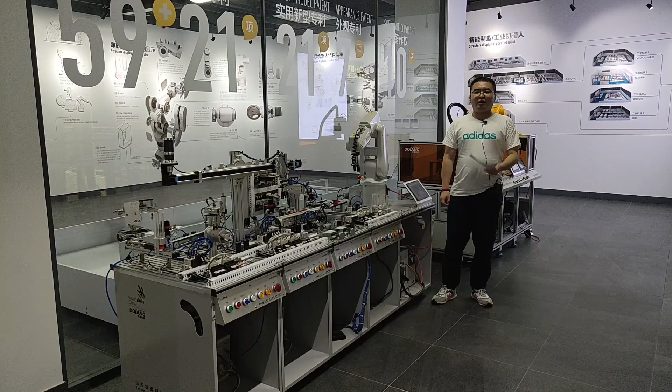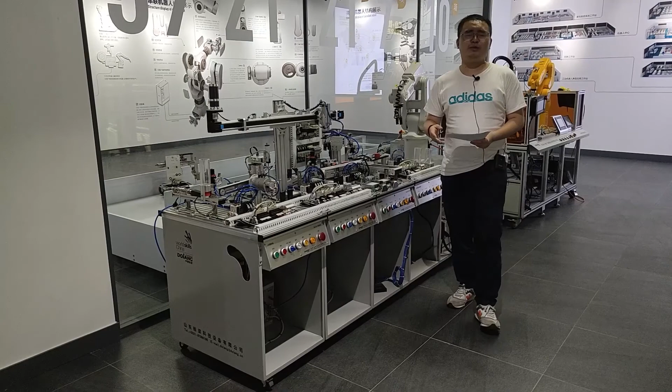Today I will introduce our modular production system DLMPS-500D, which can really reproduce actual industrial production process. In the next 2 weeks, we prepare a wealth of vocational equipment, operating and knowledge. If you have anything you want to know or are interested in, please feel free to contact us. We will reply to you in time.

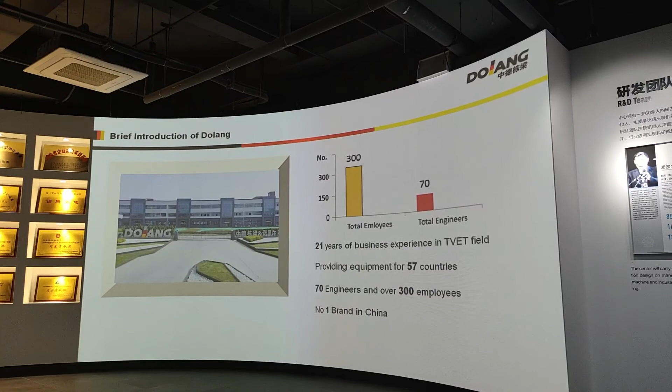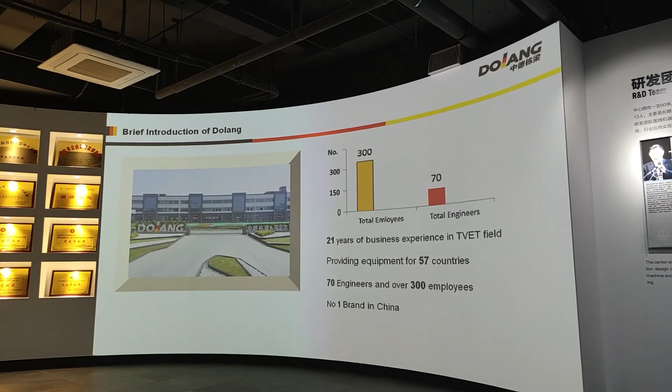Dolang was set up in 1998 and has been 21 years in the vocational education field. We focus on sharing China's vocational education experience and equipment with the world. Now we have successfully gotten cooperation with more than 57 countries. Dolang has 300 employees and 70 engineers among them.

You can see from the list here that Dolang has a very large series of products that can cover almost every type you need.

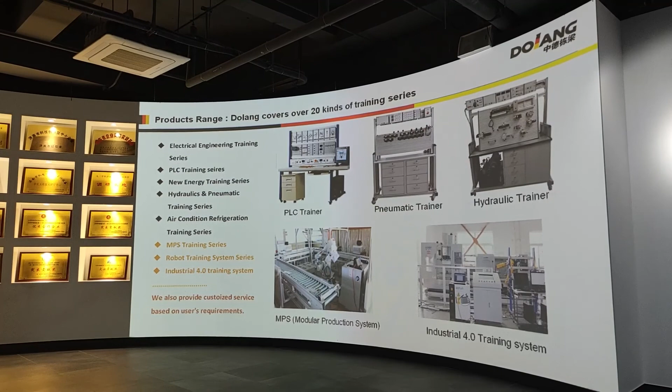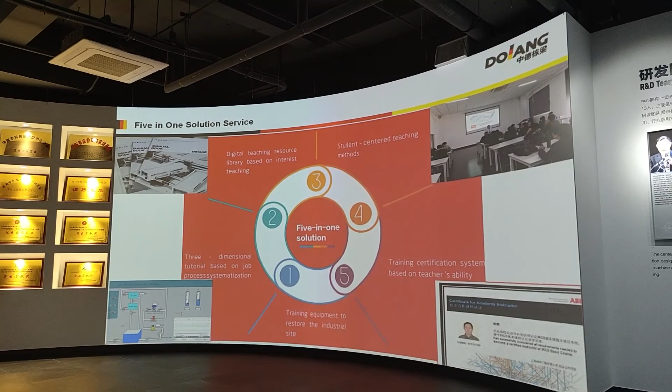This is our 5-in-1 solution service. Let me explain what 5-in-1 solution is. We can see 5 different resources we can provide for schools: the first is training equipment, the second is 3D simulation software, the third is digital training materials, the fourth is training method, and the fifth is training service.

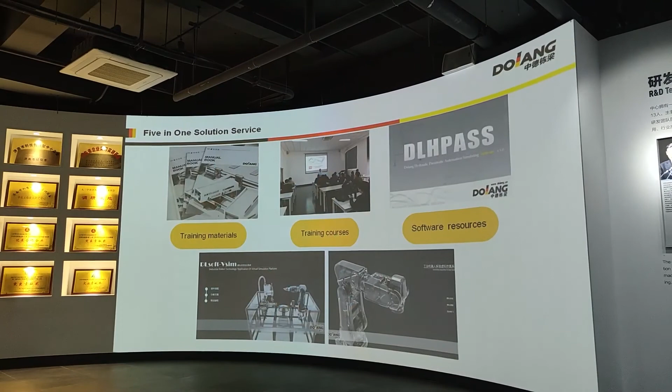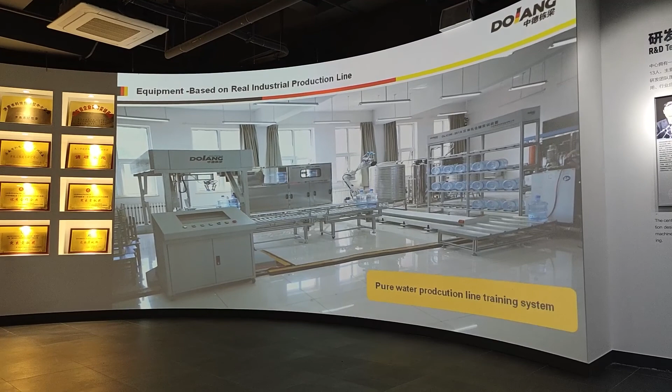This is a picture about the pure water production line training system, which can really reproduce the industrial production process about pure water.

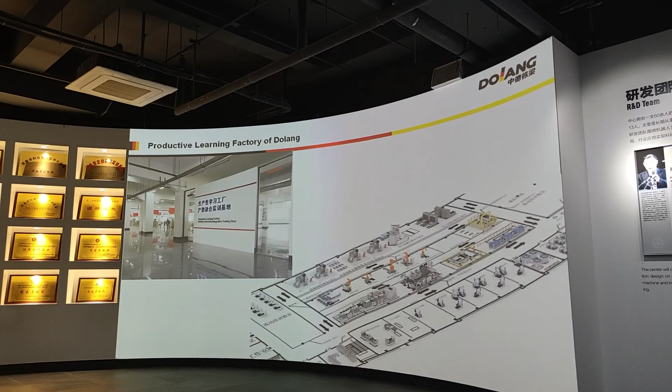This is our productive learning factories of Dolang. It's based on the 3rd floor of our factory. Here is some equipment of the productive learning factory.

The second part is our international cooperation. Dolang has a lot of international project experience.

The first picture is from a Myanmar promotion meeting. This is a meeting held by our partner in Myanmar. We also invited the Minister of Education to this meeting. A lot of school representatives were there to exchange with Dolang.

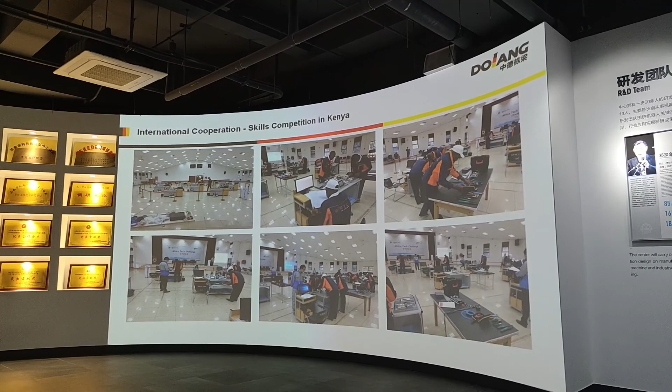This is a picture that we helped Kenya to build their first skill competition. The picture is with cooperation from the Ministry of Education in Kenya.

Here is a picture. Our engineers sometimes go out for training according to our customers' requirements.

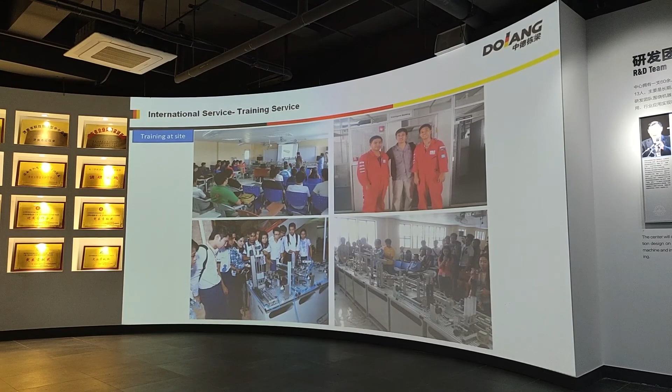This is a picture that we built a training room for Indonesia. This is a promotion meeting.

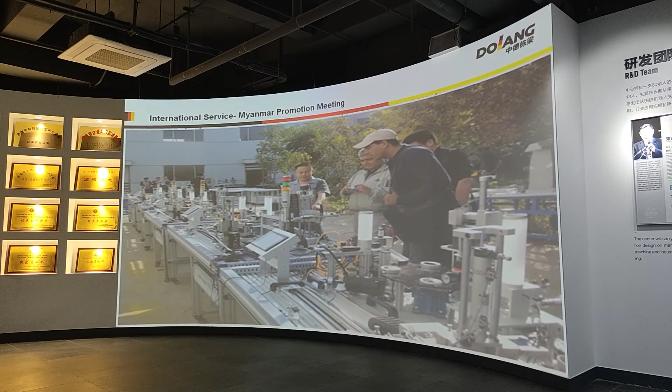The man wearing a white hat in the picture is the Minister of Education in Myanmar. This is a picture of our cooperation with the Ministry of Labor in Cambodia.

We have rich experience in skill competitions and professional management. We can provide a complete solution for skills competitions. We have grabbed headlines in CCTV News 6 times in 3 years.

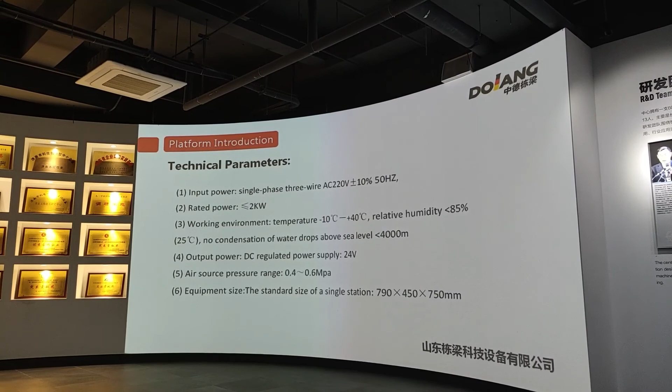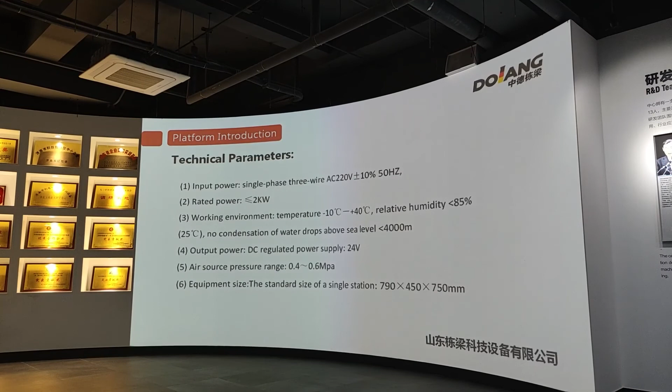This is the technical parameters of the equipment. Our equipment has been exported to many foreign countries, taking into account the voltage and frequency of each country's power supply. We have adapted the power supply, which can basically meet most of the needs.

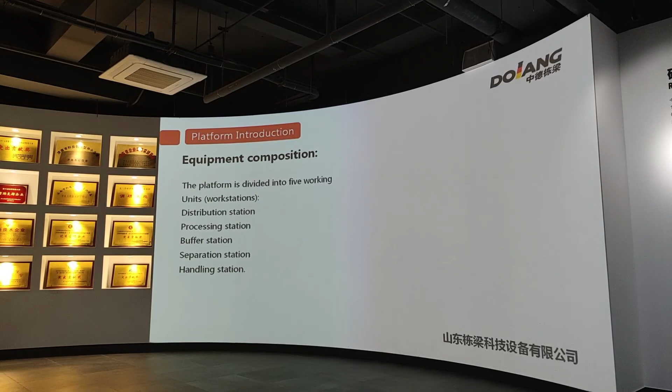The platform is divided into 5 working units: the distribution unit, processing unit, buffer station, separation station, and handling station.

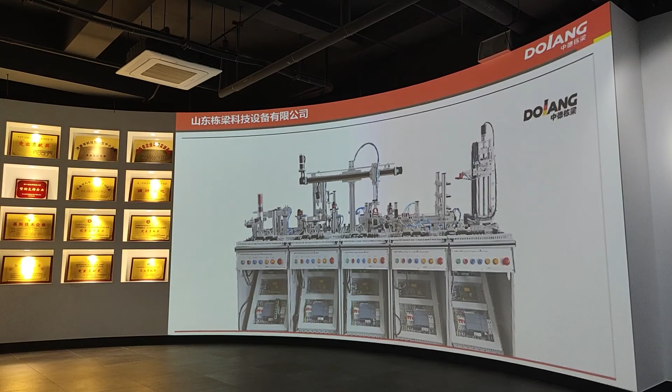This is an introduction for each station. The first is the distribution station. Its main function is to provide processing workpieces one by one for the processing process. During the feeding process, the mini cylinder pushes the workpiece out of the silo.

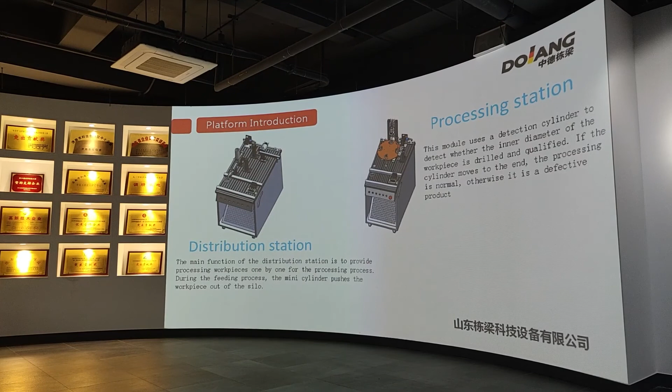The second is the processing station. This module uses a detection cylinder to detect whether the inner diameter of the workpiece is drilled and qualified. If the cylinder moves to the end, the processing is normal, otherwise it's a defective product.

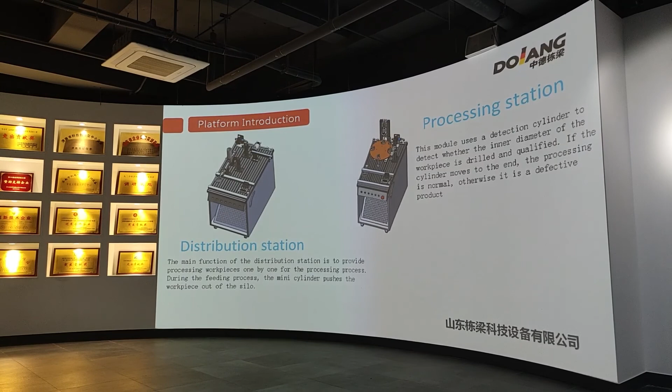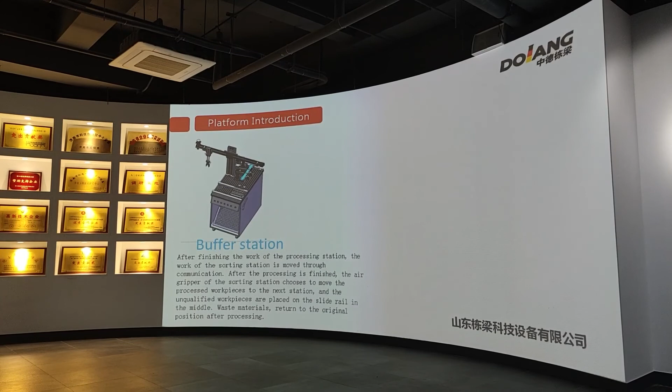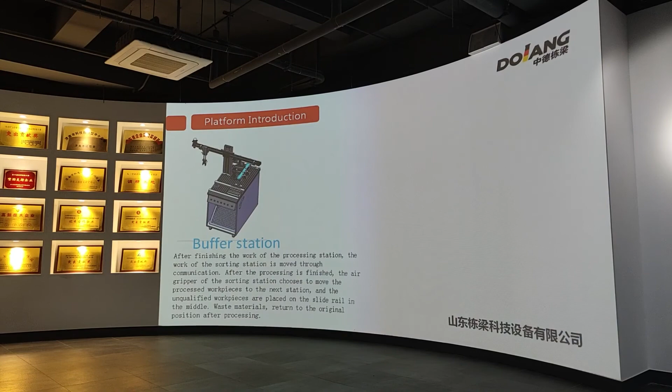The third part is the buffer station. After finishing the work of the processing station, the work is moved through communication to the sorting station. After the processing is finished, the air gripper of the sorting station moves the processed workpiece to the next station.

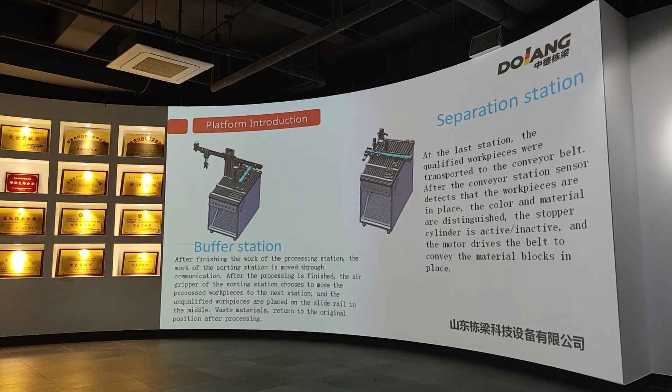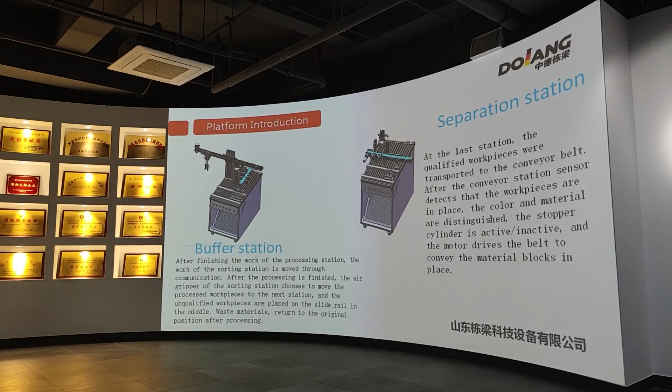The separation station is next. As the last station, the qualified workpiece is transported to the conveyor belt. After the conveyor station sensor detects the workpiece is in place, the color and materials are distinguished. The stopper cylinder is active and inactive.

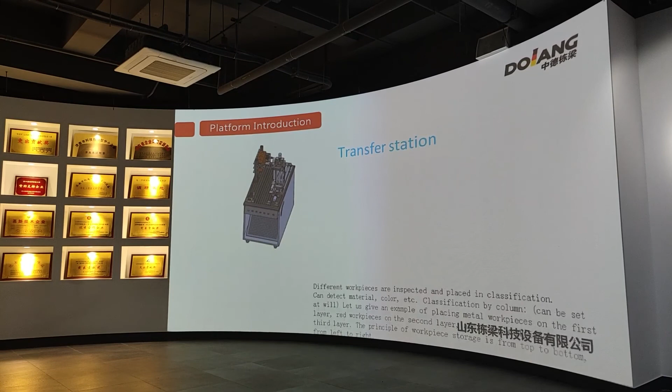The last station is the transfer station. Different workpieces are inspected and placed in classification, which can detect material, color and so on. Classification by column can be set as well. For example, placing metal workpieces on the first layer, red workpieces on the second layer, and other workpieces on the third layer. The principle of workpiece storage is from top to bottom, from left to right.

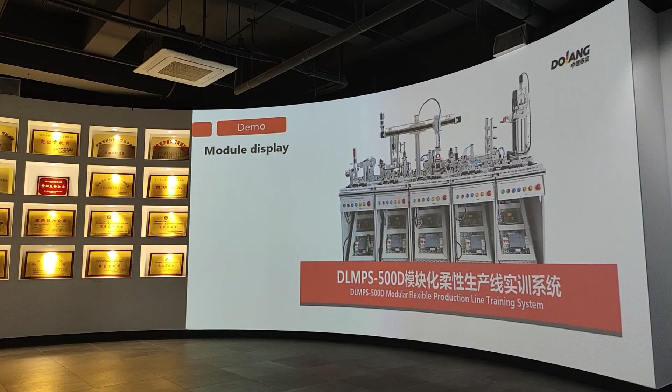Next, we will give you a demonstration of the DLMPS-500D. Let's have a look.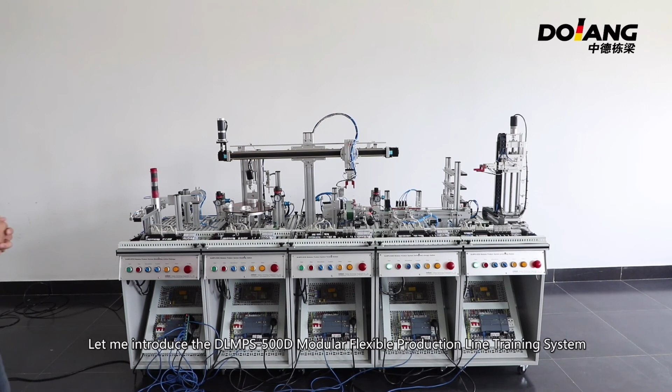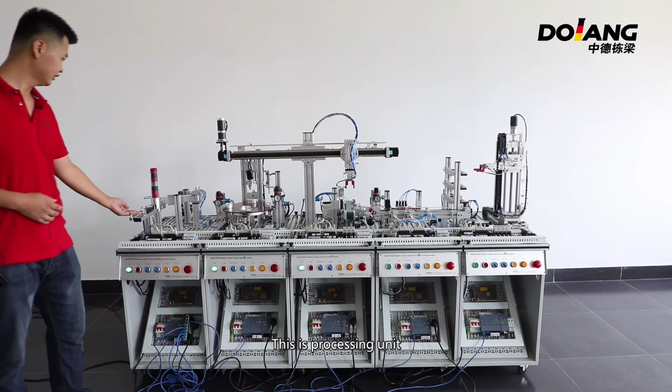Hello everyone, let me introduce the DLMPS-500D Modular Flexible Production Line training system. The equipment is divided into 5 units: this is the feeding unit, this is the processing unit, this is the handling unit, this is the transmission unit, and the last unit is the storage unit.

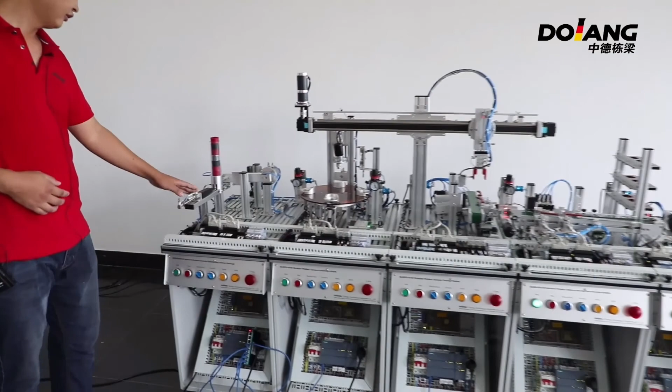Each unit of our company can operate on a single machine or online. Let me introduce the following units. First, let's observe the feeding unit. The feeding unit is controlled by PLC, and the PLC selection is Siemens 1200.

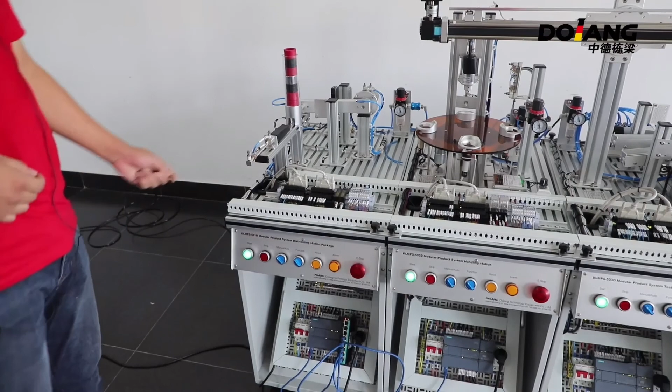The driving device is mainly composed of a pen cylinder and a rotary cylinder. The sensor is composed of an optical fiber sensor and a mirror reflection sensor. The driving device also has a pneumatic solenoid valve.

Let me show you how to operate our feeding unit. First, press the emergency stop to make the equipment reach the initial state. The green light is flashing. If the green light doesn't flash, you can press the reset button to bring the device to its initial state.

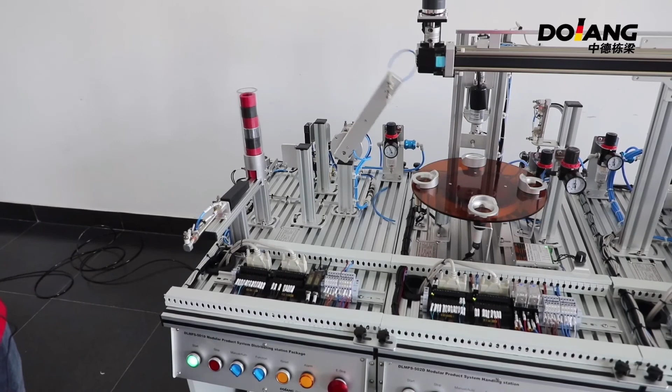Now start the device and observe the single machine movement process. The single machine process needs to take away the piece after it has been moved, because there is no detection device in single machine state. If two pieces are placed again, the state of superposition will appear.

The feeding unit works normally. If you want to stop the device, just press the stop button. The red light of the stop button is always on, which means our equipment is in a start state. It will stop itself after it has completed the action.

We found that the suction cup does not catch the block. This is because the cylinder retracts faster, the workpiece rebounds, and the suction cup does not catch the workpiece. How to solve the problem? Just adjust the regulating valve and the pen cylinder, adjusting the speed of retraction to solve this problem.

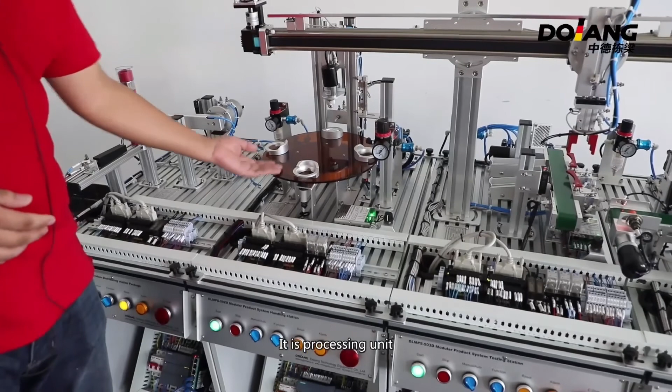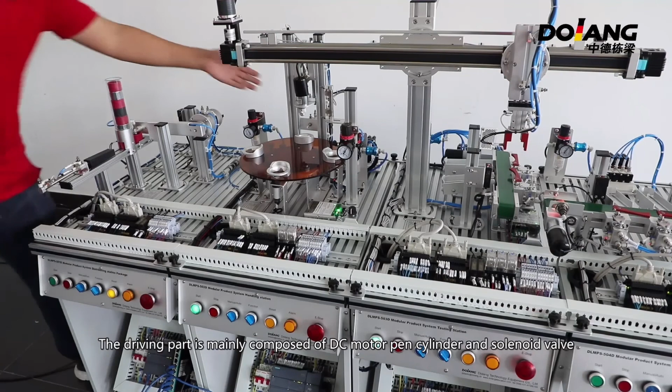The second workstation is described below. It's the processing unit, mainly controlled by Siemens PLC 1214. The driving part mainly consists of DC motors, pen cylinder, and solenoid valve. The input part consists of a photoelectric sensor and a capacitive sensor.

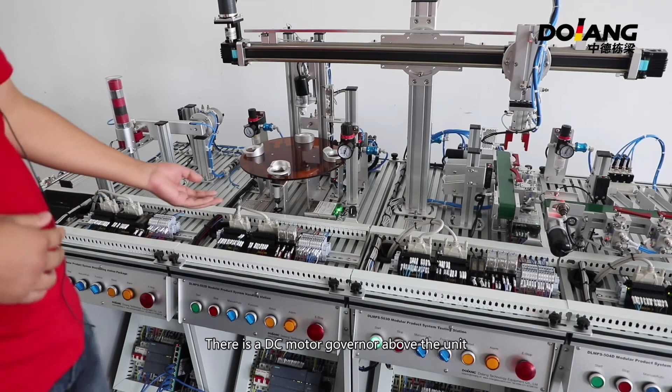There are two DC motors on the device. How do they adjust the speed? There is a DC motor governor above the unit. We can test the speed by swinging the blue button on the intermediate relay on the DC motor.

At this point, the motor is running. If the speed of the motor is faster, you can rotate the speed control button to make the motor reach the appropriate state. The smooth rotation of the motor represents the proper adjustment of the motor.

We just need to break off the blue button. The flashing green light of the equipment indicates that the equipment has reached the operational state. If we make a device that is not fully started, put the piece here, the yellow light is flashing, meaning our equipment is not in operational condition. The green light is on when the workpiece is taken away.

Although the green light of the device is flashing, it's necessary to reset the turntable to find the zero position so as to achieve a precise pattern. The device can be started when the green light is flashing. The device is now started. Put the workpiece in the entry position. The equipment is running normally. We can try another one.

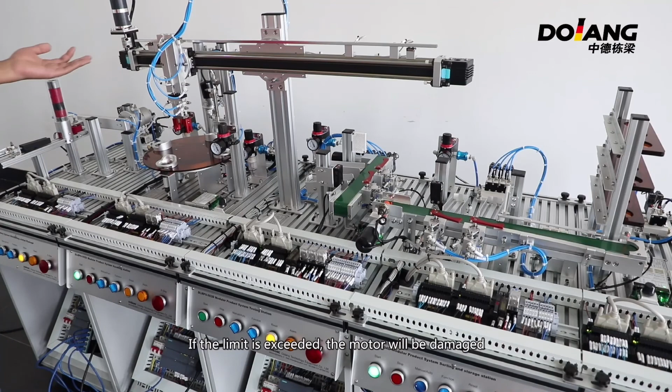Speed regulation of sorting motor conveyor belt. Pull the third intermediate relay. Use the adjustment button to achieve a proper speed. The motor is in normal operation, with speed within the acceptable range. Bring it back.

The yellow light is flashing, representing that the device is not in the initial state. Press the reset button to make the device return to initial state. After the manipulator moves to the left switch, it will find the origin position by itself.

The green light of the equipment indicates that the equipment is within the operating range. Press the start button, and place the workpiece at the exit device and the second station.

The speed of the motor we adjust is relatively slow. We can adjust the speed by adjusting the button during operation. You can see that the workpiece doesn't slide down here. Just adjust the stop in one direction.

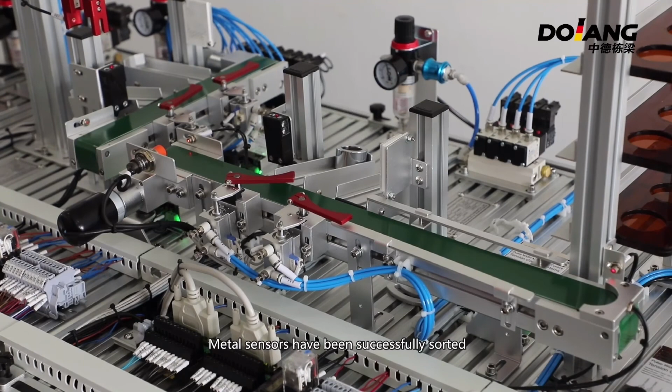Put the block at our entrance. Let's try. Metal sensors have successfully sorted it. The force station operates normally. Press the start button - the green light is flashing and the device is started.

Let's talk about our last stop. The storage station has the function of placing the block in a fixed position. Let's realize the motion of the manipulator.

The intermediate relay can be pulled to make the manipulator move. These plates have a magnetic switch and a travel switch. When pulling the intermediate relay, the equipment is not controlled by PLC. Attention should be paid when moving it to another direction - do not touch the metal surface, as it's easy to damage the equipment.

Let's stand in the warehouse and explain. The storage station also has two motors. The speed is regulated by two DC speed governors. Our equipment is flashing yellow light, meaning the device is not in startup state.

Press the reset button for final arranging of the device. The green light of the device is flashing, so the device can continue to operate.

We press the green button and place a material block at the position of the optical fiber sensor. It can be started - our blocks are sorted in S shape in single machine mode. We are placing a block for observation. Let's press the start button now.